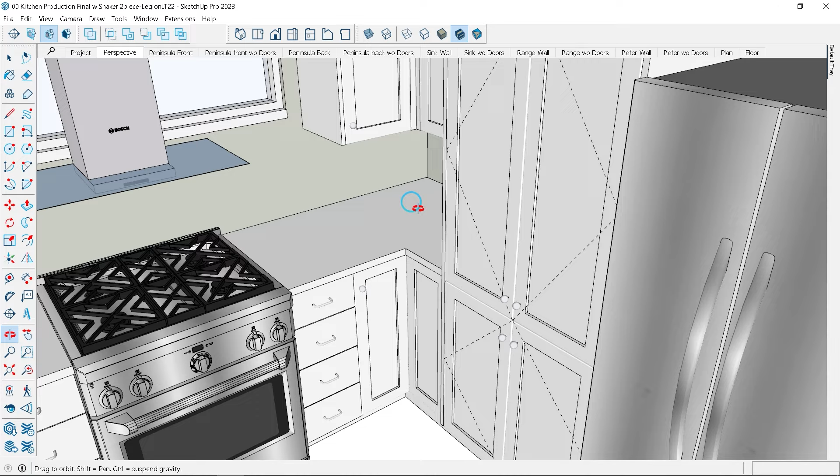To produce these kitchen cabinets, we worked with a master cabinet maker, Michael Zamarza, located in San Bernardino, California. Following Michael's expertise, we were able to assist in each stage of producing these kitchen cabinets.

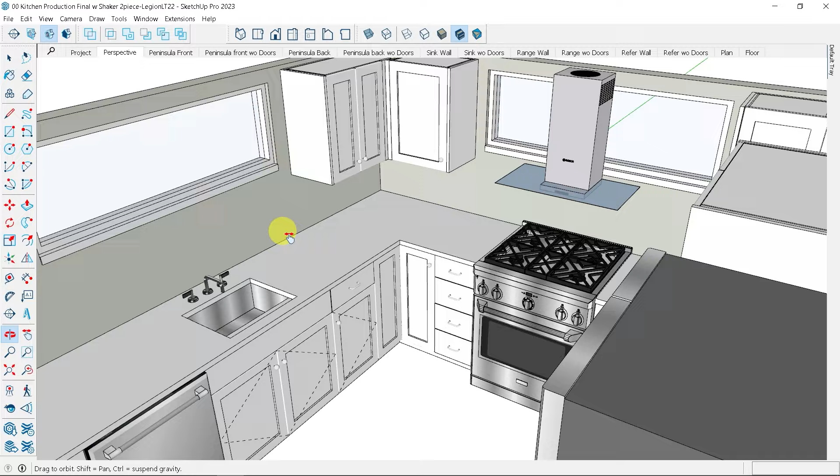Here, Michael uses SketchUp to design the entire layout of the project and then exports all these components out to the Vectric software to create the toolpaths for the machine. After the design is finalized, it came out to be 17 cabinet boxes to complete this project, and the main material for most of these boxes was 3/4 inch melamine.

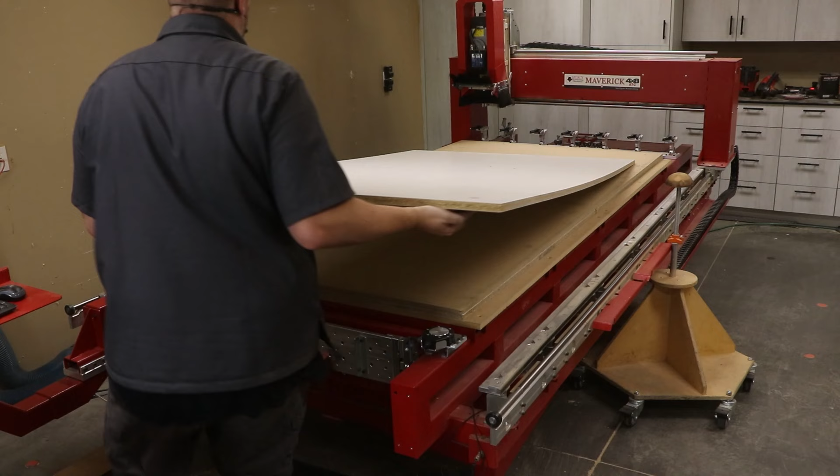Let's take a look at how the Maverick 4x8 CNC system is able to produce sheet goods for all of these kitchen cabinets. Each sheet is being held down with our vacuum table hold down system. This vacuum table is a modular option that can be added to the Gen 4 Maverick 4x8 CNC systems at any time. We opened the dust shoe brushes throughout this entire cutting demonstration so we can see what's happening.

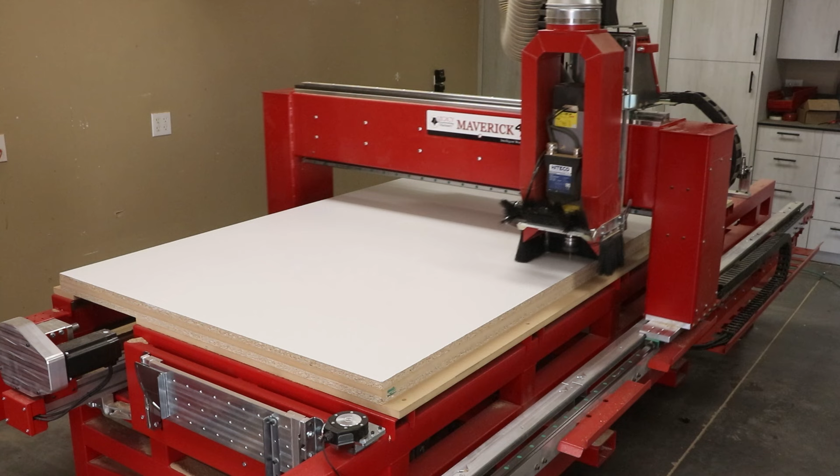The first milling process on the CNC is drilling holes. Using two different drill bit sizes, we were able to accommodate all of the hole patterns for hardware such as drawers and doors, as well as shelving holes, and even through holes to screw the boxes together while being assembled.

Another key element in the Maverick 4x8 CNC system is the auto tool change. Not only does this allow us to automatically switch out cutters throughout the entire milling process, but it also allows the operator to do additional tasks while the machine is working.

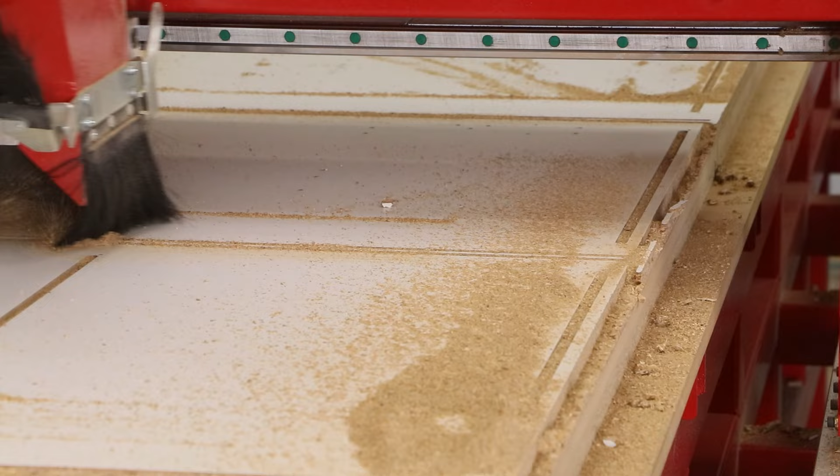The last milling processes are to simply cut out the parts out of the sheet. By nesting multiple parts out of each sheet, the CNC is able to reduce wasted material across the entire project. This first cut is using a roughing end mill to quickly remove material around the perimeter of each part. After roughing, a compression cutter is then used to complete a finish pass around the perimeter of each part as well.

It took about 6 hours to produce all the sheets for the entire project, and each sheet took anywhere between 12 to 20 minutes depending on part sizes.

All the cutters used throughout this entire project are from magnate.net. By producing a roughing and finish pass, our cutters are able to last much longer. The parts also have a cleaner finish and less tear out along the edges.

A big shout out to Michael for sharing his expertise and for guiding us along the entire process of producing these kitchen cabinets. In the next video of this kitchen cabinet project, we will show how all of these parts are assembled to create cabinet boxes.